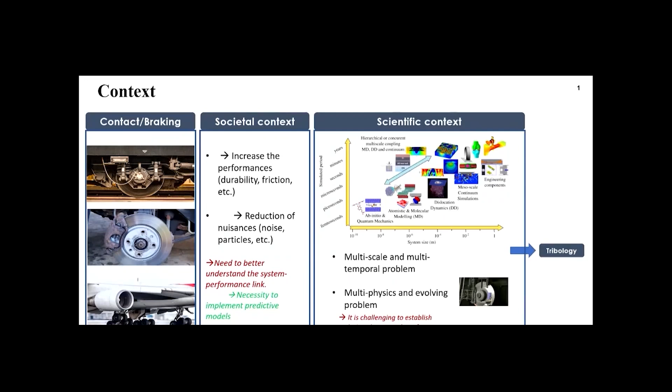So for solving this problem, we need to analyze it from different aspects like multi-scale and multi-physical modeling for having a good point of view for analyzing this problem. As the contact problem is a tribology problem, we consider this part of the science. At first, tribology is the study of friction, noise, wear, and also lubrication when two bodies are in contact.

But when two bodies are in contact, the surface is not so plane. So we have localization of the contact during the process. And this localization and concentration of the contact induce heat and concentration of stress. This problem can induce noise pollution. That is the problem in our train stations during the braking of trains. So we need to understand this problem for reducing this noise pollution.

Another aspect is particle emission during the contact. This particle emission can have an impact on our water, on all of the environment. So understanding this problem is crucial.

For understanding this problem, we have some approaches like numerical methods, finite element methods, with a complex model, for example, here we have a complex numerical model, or a simplified model, but always we have a gap between experimental modeling and numerical modeling. So we have some scientists that use a complex model or simplified model, also experimental modeling, but always because of the complexity of the problem, we didn't have enough results. For this reason, we are going to use AI.

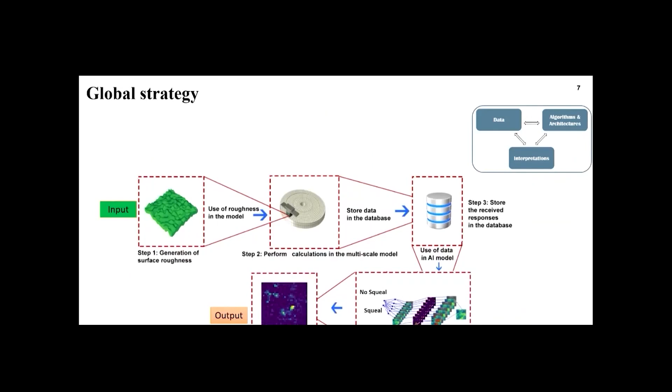For the first aspect, we are going to follow this scenario. At first, we are going to generate some surfaces using the simplified finite element model to create a database. After that, find a good architecture, and then at last interpret our data. As I said, one of the problems for using deep learning in the mechanical aspect is that we need relevant data. And having data for a mechanical model is not so simple. For this reason, we needed to generate data using the finite element method.

Here we have a simplified model, we have just a pin on disk, and the disk is rotating. And for each test, we are going to generate another type of surface. As we can see here, if our surface is so plane, the concentration of the stress is there. As we have a surface with another type of geometry, the concentration of the stress is not homogeneous, and it's not in the interest of the surface.

For generating our data set, as I said, for each application, we have another surface, and the surface is going to our model. Then, if we have the vibration or non-stability of our system, we are going to create a data set, like a binary data set, for having a surface with the risk of vibration or without the risk

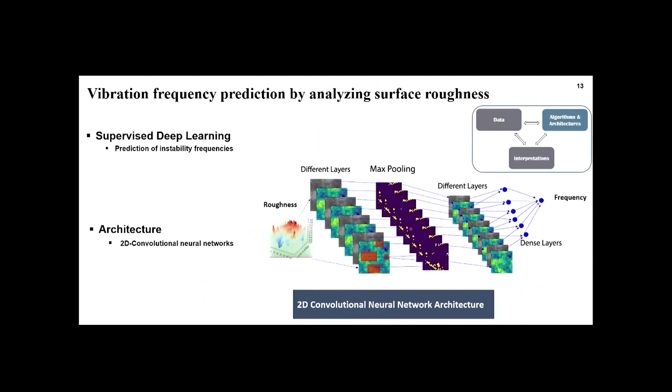After doing that, for this classification, another thing that was interesting: just looking at the surface geometry, can we have a prediction about the frequency of the vibration or not? Again, we are going to use a convolutional neural network because of the geometry of our surface, for keeping the spatial form of the geometry, and also for having more information during the training phase.

After that, we are going to have a discussion about the interaction between bodies and the evolution of the temperature. For this part, we used the test bench for having the experimental data. As we know, it's not always just the modelization data that can be interesting for doing our deep learning application. After creating the data set, we are going to talk about the architecture of our AI model, and after that, about the interpretation of the results.

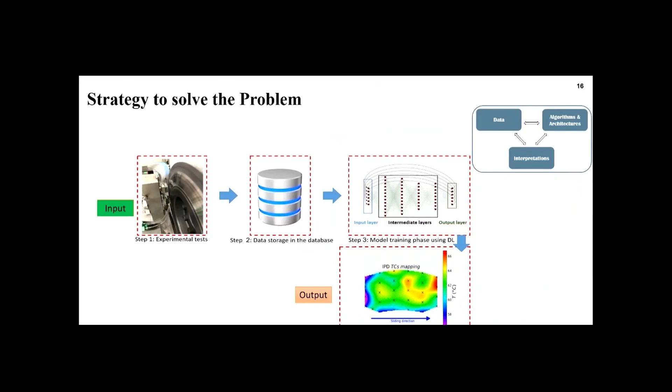As we can see here, for generating this data set, we used a bench test with this geometry. And the bench test was a pin on disk, exactly the same that we had for modelization in the previous chapter. After that, we put the thermocouple here for having more information during contact. Because when we have two bodies in contact, we cannot see, we are not going to have more information during the contact process. For this reason, the evolution of temperature can be a good representative of the phenomena during the contact.

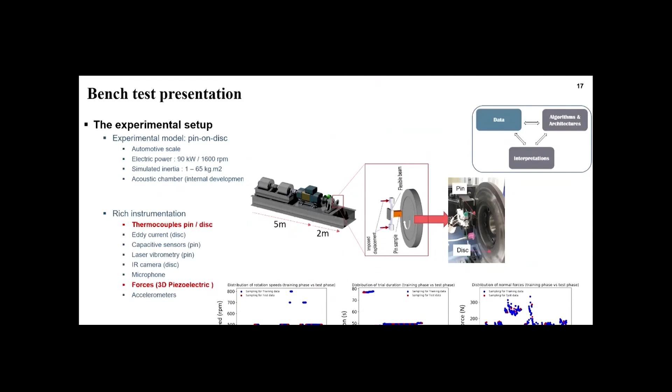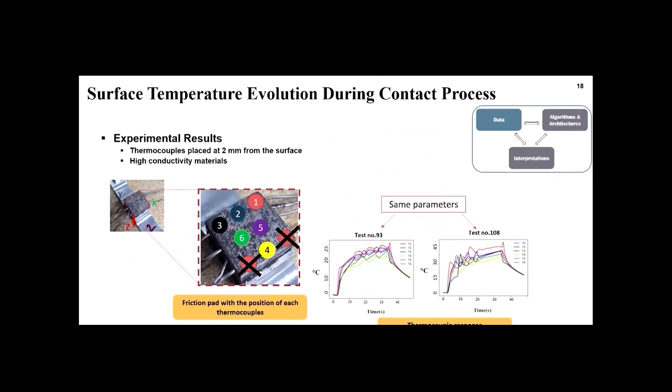As I said, for having information during contact, we placed 8 thermocouples, but we lost 2 thermocouples during the test, and we continued the test using 6 thermocouples. As we can see here, the evolution of the temperature is not linear. Also, over time it's not linear, and for each thermocouple it is not the same. So our problem is very complex.

As input for training and validation, we would like to use just the evolution of temperature at the start of the test as a known, and also the normal force as a known, because it's us who apply the force during the contact. And the target is the prediction of the evolution of the temperature during the contact.

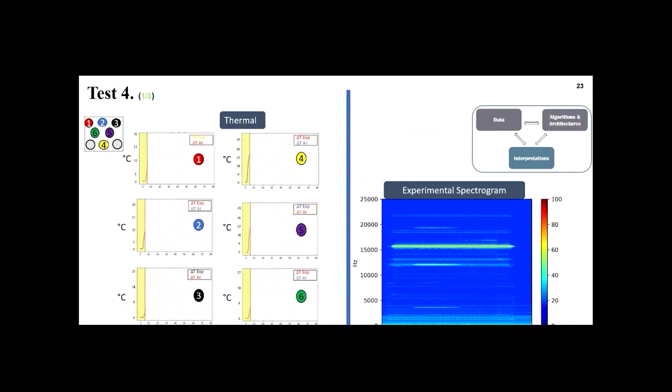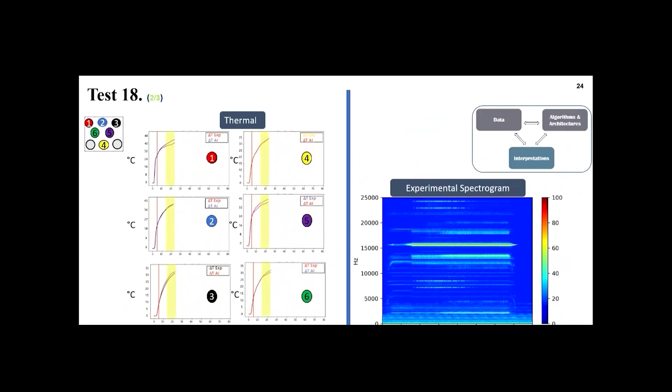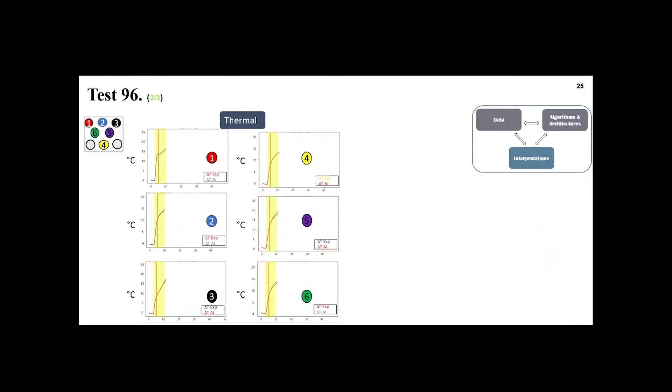And in another test, when we have more temperature evolution, as we can see, the model is not good either. And when we look at the spectrogram, as we can see, when the spectrogram is very noisy, the model is not going to have a good prediction. For this reason, we need to establish a meta model or to find what is the difference between these different spectrograms, the different behavior of our system.

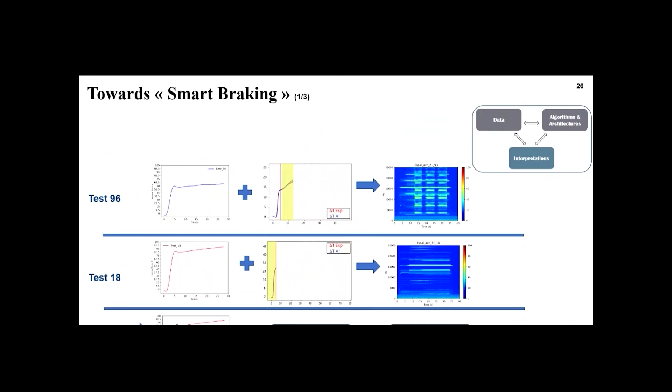The only difference between all the tests is the normal force. So when we change the normal force, the behavior of the system is going to change. The idea is, for the AI model, if we swap the force of this test with this test, what will be the results after this change for our AI model?

As we can see here, the red curves are the results of the AI model, and the blue ones are the real results. So our model is going to tell us, if you change just the force, the evolution of the temperature on your surface is going to change. So here we need to have a criterion: when the temperature of the surface is going to change, what can be the effect on the surface, on the performance of the system?

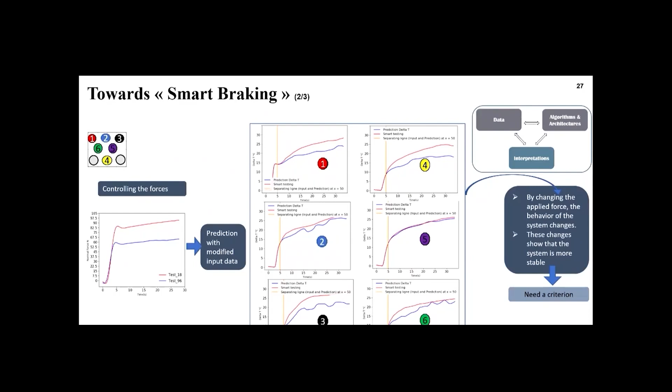As we can see here, we are going to try to use this evolution and analyze it in terms of the frequency generated by the system. As we can see here, the input is just the temperature evolution, and we can have a good prediction about the intensity of the frequency. But when we have a chaotic spectrogram, we are not good at doing this prediction.

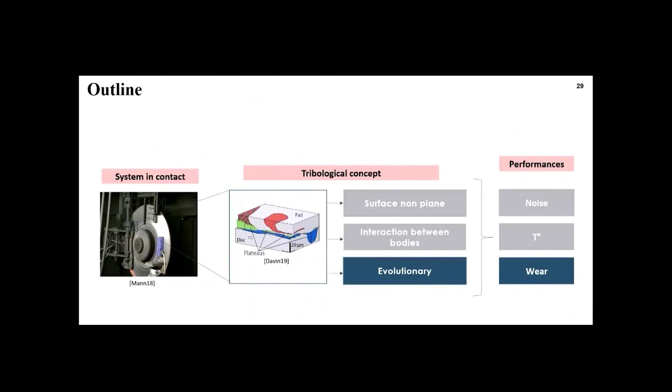So this time we are going to discuss the evolution of the surface for having more information during the contact process. For doing that, we can discuss this in two aspects. The first one is the evolution of the surface. The other one is the mechanical fields. These mechanical fields can be generated using finite element methods.

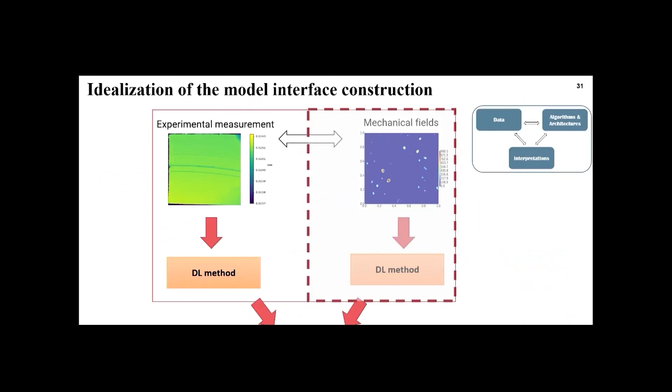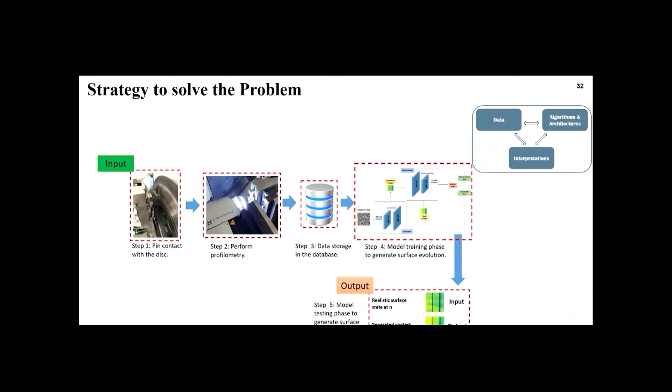At first, we are going to talk about the evolution of the surface. And for this one, we also have this scenario. For creating the data set, we are going to use the same bench test. And after each braking test, we are going to do a test called profilometry, for having more information about the evolution of the surface during the contact process. After that, finding a good architecture adapted to this problem. And at last, we are going to talk about the results.

For creating this data set, we use the same bench test as for the evolution of the temperature. And after each test, we use this instrument for doing the profilometry, for having more information about the surface geometry. The features are the normal force, the duration, and the rotation speed for each test. We chose a supervised learning algorithm, and the algorithm was a generative adversarial neural network, in short GAN.

And as we can see here, this is the input, this is the expected output, the real results, and this is the output from our deep learning. It's not good. So we needed to find another solution for having a good prediction. This time, using this method, we are going to increase our data set. We used this method for having subsets of each image to increase our data set.

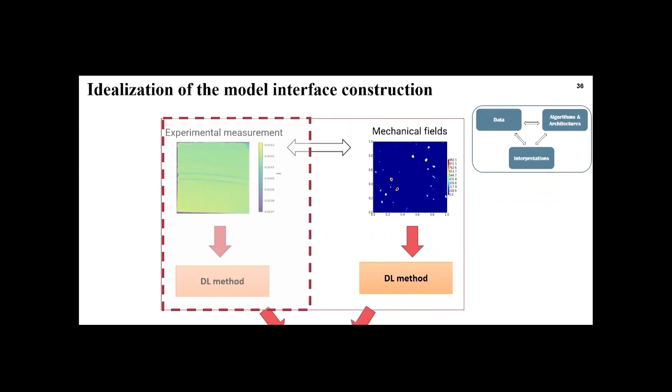And after that, we can see here, this is the input. This is the output of the real experimental test, and here we have our prediction. It's not so good, but it's better than our previous application. So for having better results, we need to apply mechanical fields, adding them to our surface evolution, for having a good model.

This time we are going to use the same model for generating the surface, but the output of this finite element method is the mechanical fields, like the stress field. After creating this data set, we applied our model for predicting the mechanical fields. And as we can see, the input is there, the surface geometry, here we have the real results, and here we have the prediction of our model. As we can see, it's not bad, and it's good to generate the mechanical fields using generative adversarial neural nets.

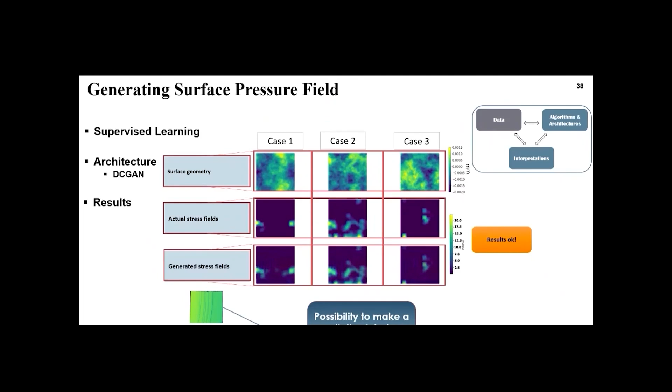For an overview, we talked about contact and braking systems. We talked about the multi-scale and multi-physical aspects, and we also talked about coupling AI and mechanics, and the necessity of considering the physics in our applications, considering the evolution of the surface, temperatures, all of them.

For the perspective, we are going to work on generating the spectrogram using GANs, and here you can see such results. This work is with Bowman, and he's going to defend his thesis next day.

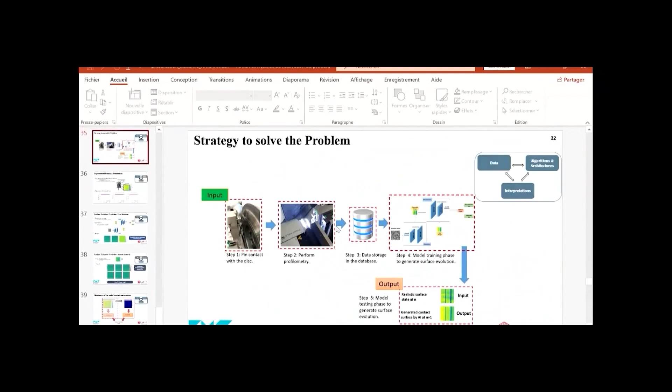Yeah, because when I use this technique randomly, I could have more detailed windows. But if it's just cutting, it's just the same pixels. But using the sliding window, the step can help for having more data. But just cutting is very... So you are sampling a lot actually. You're sampling a lot of things. Yeah. Much more than if you were just... Exactly. Yeah.

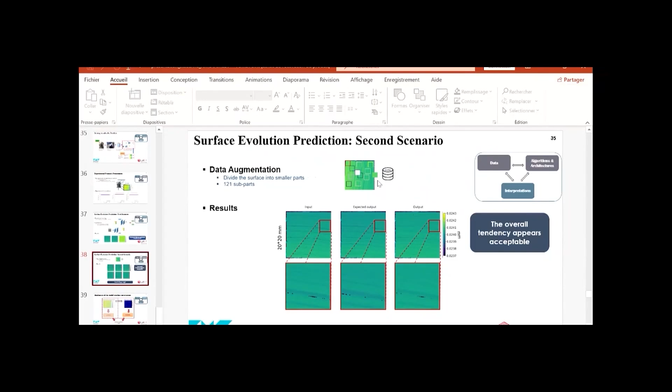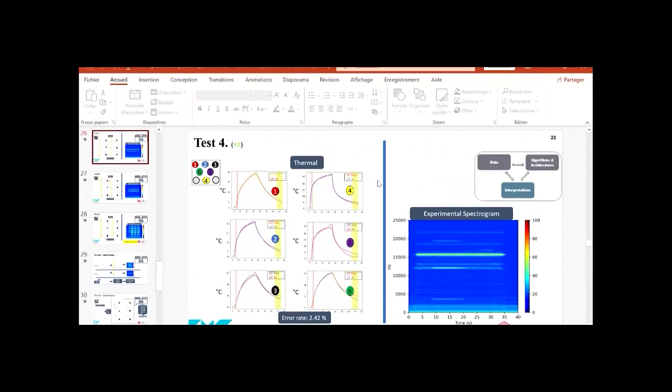So basically, you said that you are using the model for generating data. Are you really controlling? How does it work? We can change the altitude of each point randomly, and when we change the altitude of the points, the performance of the model and the behavior is changed.

Another question from this part. So our AI models seem to work pretty well. But my question is, does it make sense to transform this problem into binary form? I was wondering about the rationale. Yeah. Here, at first, we had a binary classification for the surface with the risk of squealing or not. And after that, using the same surface, we used the model for regression, for predicting which frequency this surface can generate at which time.